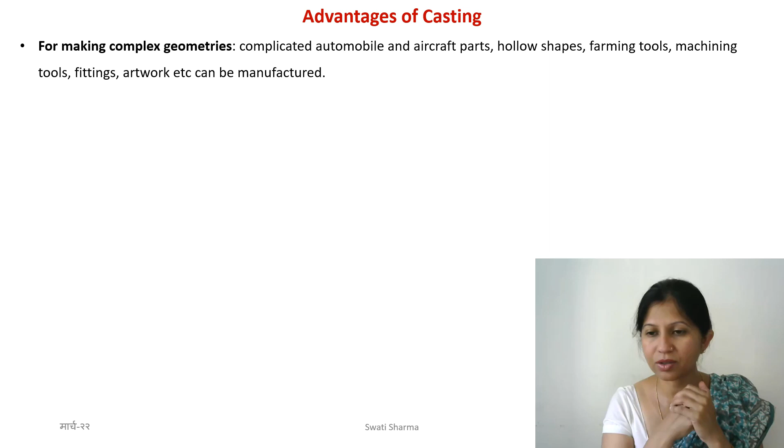Okay, so intricate shapes. What are intricate shapes? When you have these very fine shapes and complicated shapes that are very close to each other and so on. And maybe sometimes there are many shapes at the same time. Your part has a lot of corners, and all of them are very thin. All of this is called intricate shapes.

Okay, for that, if you perform machining or if you perform anything top down, then it will be very difficult. It will be a very tedious task, and also you will end up generating, for example, a lot of stresses in the material which can lead to cracking and so on. With casting we can do it very easily.

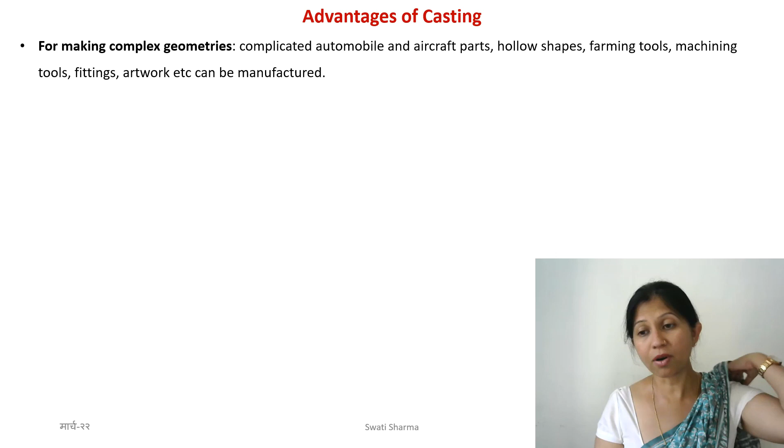Once we make the pattern, then all we need to do is prepare the mold and then fill in the molten metal. And as long as we are taking care of all the casting parameters, we are making sure that the solidification is done on time and pouring is done without having gas bubbles and so on. In that case, we can make these shapes very easily using the casting process. So that is one big advantage, and that is why for many complicated shapes, casting is the preferred technique.

What else? So, by the way, there are also some examples here. You can see that starting from household tools and fittings and so on, all the way to airplane parts, various engine parts for automobiles, very complex ones. Sometimes these parts are very large, which contain some hollow shapes and also some very intricate shapes and so on. So these very complicated geometries can be manufactured using the casting process.

Okay, low maintenance and relatively low production cost. So if you have a large machine which operates and which has multiple parts, of course more maintenance will be required. When you have just a mold and you're filling in the metal, then relatively less maintenance is required. So in that sense, this also reduces the production cost. So that is one more advantage of the casting process.

And again, depending upon what kind of casting you're performing, die casting or sand casting, maintenance will be slightly different for each case. But if we compare it with other manufacturing techniques, then it is a relatively low cost technique.

Also, it enables large scale production. As I told you, during investment casting, you can make multiple parts in the same tree-like structure. So even that is an example of batch fabrication. Now you're not making one thing, but let's say 50 of the same things in the same batch. So that is a batch production. So casting does allow for batch production as well.

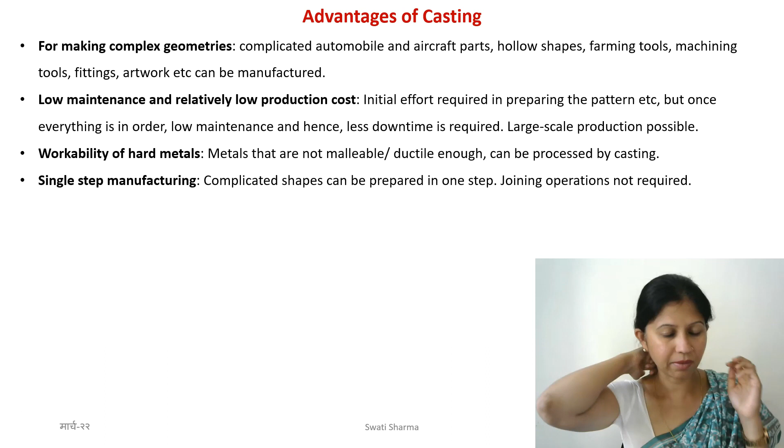Okay, this is a single step manufacturing, so you don't require joining, and that is also something very interesting. I like it. We don't need to do anything once you're done with it. You can just perform surface polishing, finishing a little bit, but you don't need to really go for secondary operations.

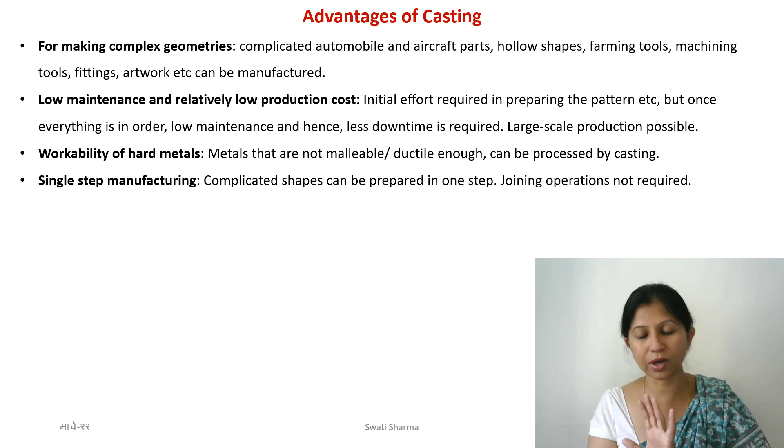For example, if you make different little parts, different sub parts of your one big part, then you will have to think of welding or somehow joining it with the nut and bolt assembly and so on. In the casting process, whatever complex geometry you have, you make the pattern of that geometry, and then in one go you perform everything. That is one more big advantage of the casting process.

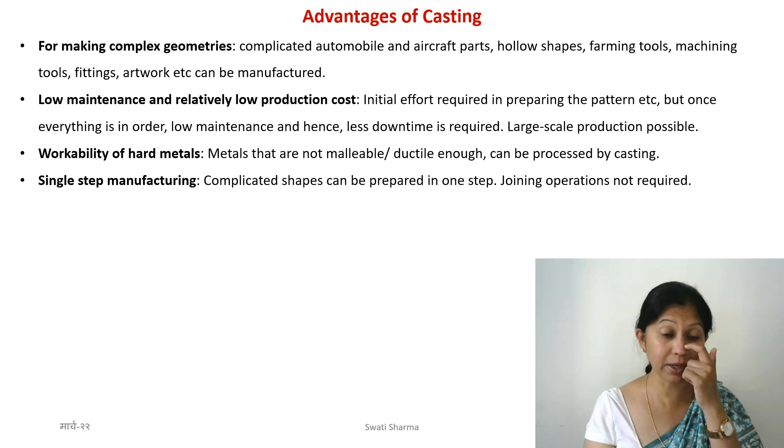So if you think of it, not just because of convenience, but it also saves a lot of time, right? It also saves a lot of manpower, and at the end, all that goes into saving cost. Okay, what else? Maybe you can think of some more. I have mentioned a few.

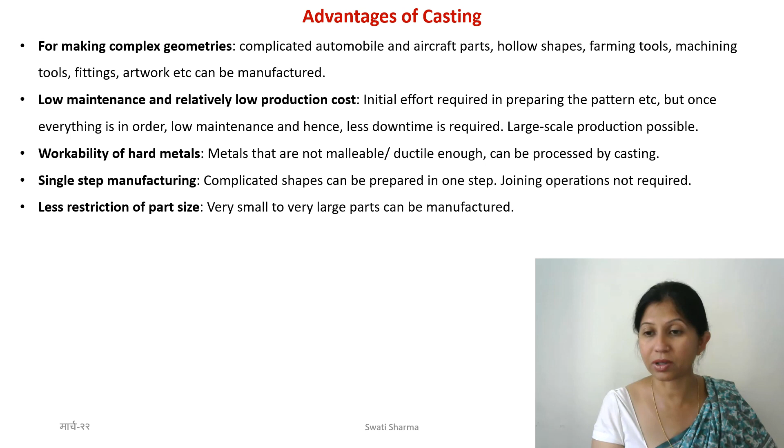Less restriction on part size. So casting, again, you can make from very small to very large parts. Although when the parts are very, very large, you have to be very careful with the solidification patterns, because sometimes then you will have different walls, multiple walls. But anyway, as long as you can take care of that, you can make different shapes as well as different sizes using the casting process.

Flexibility in mold design. Of course, there is a lot of flexibility in mold design. You can accommodate various shapes. So this is also again going back to the complex geometries. One more thing is that various surface textures can also be accommodated. So not just the complicated or hollow or intricate shapes, but also different surface textures. So that is the flexibility. A lot of design flexibility is there in your casting process.

And one very big advantage is that this is a well-known technology for several years. It's a very traditional manufacturing process, and that is why people have the know-how. Know-how means people know how to do it. So what kind of challenges will be there? What kind of safety precautions you need to take? You already have a lot of experience with the casting process. The society has a lot of experience, and that is the reason it is also a very commonly available knowledge and technique. Okay, so this was all about the advantages of casting.

Now I want to tell you a few more definitions. Maybe I have missed them out. What is foundry? Whenever people talk about casting, they say foundry. Foundry is basically the name for the industry where casting is performed. So the entire casting industry, metal casting mainly, is known as foundry. So that is the terminology that is used.

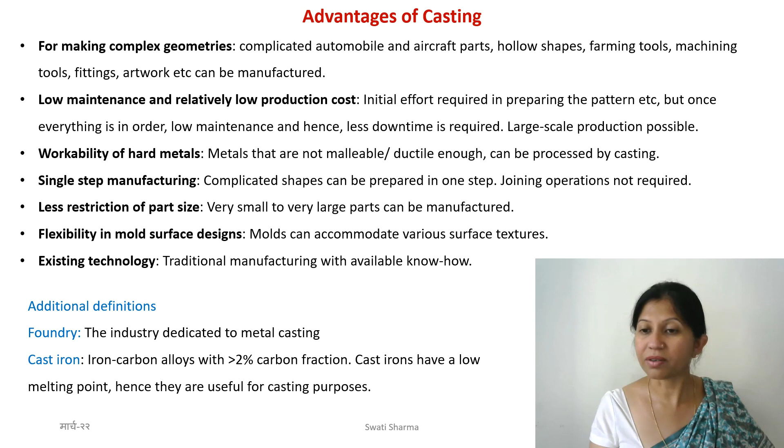Now maybe it can be a little more complicated. This is a general definition. There are very specialized steels and so on that we are not going into. All right, so these were the advantages of the casting process.